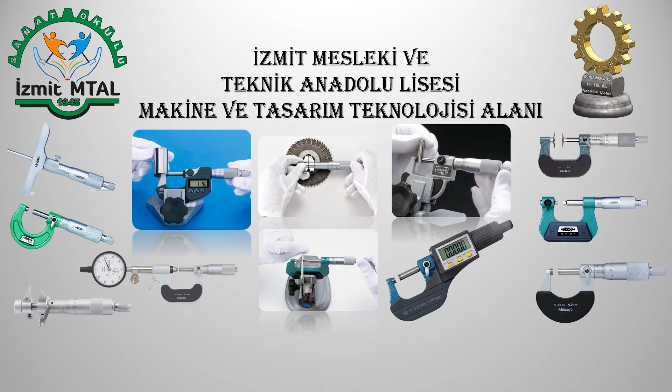Mikrometreler de bir ölçüm ve kontrol aletidir. Bu ölçü aletleri, mekanik kumandalı vida somun sistemine göre çalışır. Ölçü tamlığı kumpaslara göre daha yüksektir. Metrik mikrometrelerde ölçme tamlığı 0,01 milimetredir. Parmak mikrometrelerde ise ölçme tamlığı 0,001 inçtir.

Mikrometrelerde birbirinden farklı ölçme alanları oluşturulmuştur. En küçük ölçme alanı 0 ile 25 mm olup 25'er mm aralıklarla 300 mm'lik çaplara kadar ölçüm yapılabilir. 300 mm'den büyük ölçme aralığı 100 mm artarak gider. Bunun sebebi ölçme işlemini yapan hareketli çenenin kısa boylu olmasını sağlamaktır. Böylece ölçmenin esneme, ısı ve benzeri dış etkenlerden etkilenmesinin önüne geçilmiş olur.

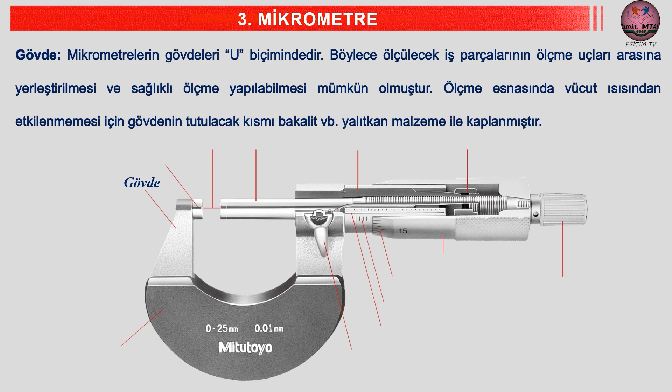Çene, mikrometrenin sabit olan ucudur. Sertleştirilmiş ve taşlanmış olan bu uç ölçme esnasında iş parçasının yüzeyine temas ettirilir. Daha sonra tambur çevrilerek hareketli uç, bu ucun tam karşısına gelecek şekilde iş parçası yüzeyine yaklaştırılarak ölçme işlemi gerçekleştirilir.

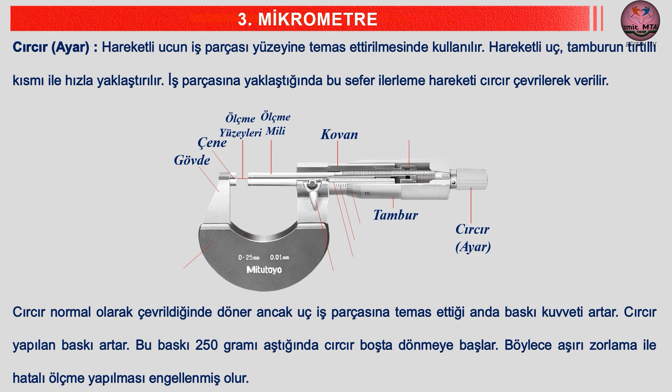Mil sabitleme pimi. Ölçme işlemi sonucunda hareketli ucun gevşemesini önlemek ve daha hassas ölçme yapabilmek için hareketli ucun tespiti için kullanılır. Burada dikkat edilmesi gereken husus, sıkma kolu kapalı durumdayken tambur ya da cırcır çevrilmemelidir.

Isı yalıtım levhası. Ölçme esnasında vücut ısısından etkilenmemesi için gövdenin tutulacak kısmı plastik, bakalit, seramik ve benzeri yalıtkan malzeme ile kaplanır.

Tambur taksimatı, kovan taksimatı, referans çizgisi.

Mikrometrelerin çeşitleri. Mikrometreler okuma sistemi ve kullanım yerine göre iki ana grupta sınıflandırılır. Okuma sistemine göre mikrometreler.

Verniyer bölüntülü, ölçü saatli (kadranlı), dijital.

Kullanım yerine göre mikrometreler: dış ölçüm, iç ölçüm, derinlik, modül, vida, özel.

Verniyer bölüntülü mikrometre. Ana skalaya ve tamburdaki skalaya ek olarak, ana skalanın üzerine yerleştirilen bir verniye skalası bulunur. Bu verniye skalasındaki bölüntüler, ana skala ile birlikte okunması gerekir ve okumalarda bir sonraki ondalık hassasiyet düzeyi sağlar.

Ölçü saatli mikrometre. Ölçme ve okuma kolaylığı için geliştirilmiş mikrometrelerdir. Ölçme hatası neredeyse ortadan kalkmıştır. Ölçme hassasiyetleri 0,01 milimetredir. Kovan ve tambur bölüntülü olan türleri olabildiği gibi bölüntüsüz olanları da vardır.

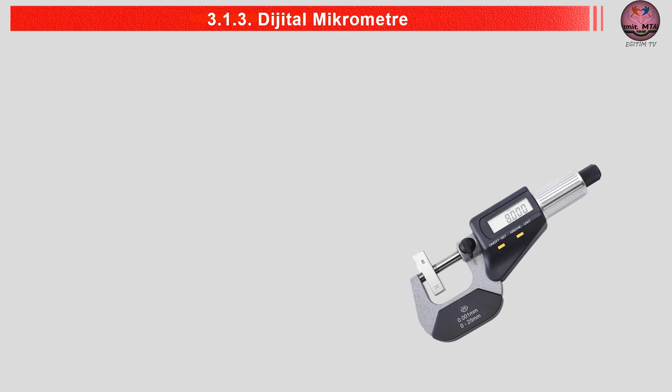Dijital mikrometre. Dijital mikrometrelerin yapı bakımından verniyerli olanlardan farkı yoktur. Ölçüyü, batarya ile çalışan donanımı sayesinde bir ekran üzerinde yazarak gösterirler. Hem metrik hem de inç ölçü sistemine göre ölçme yapabilirler. Bazı tiplerinde USB çıkışı bulunup yapılan ölçümler bilgisayara aktarılabilir. Bu mikrometrelerin üzerinde ölçü sıfırlama, mutlak artımlı ölçüm, ekran sabitleme olmak üzere genellikle 3 adet buton bulunur. Mekanik mikrometrelerde olduğu gibi verniyer bölüntüsüne sahip olduğundan pili bittiğinde de ölçüm için kullanılabilir.

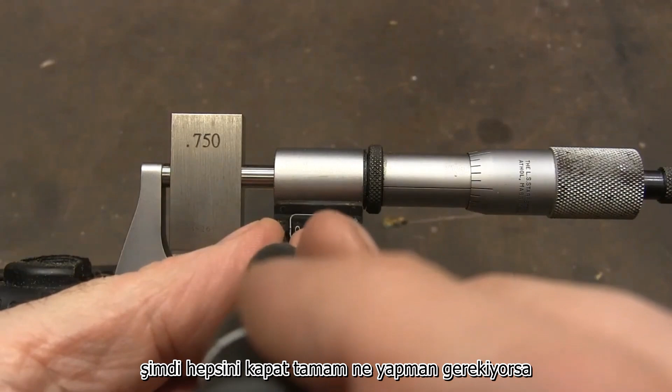Now the thimble, fixing this part is really straightforward. Let's lock the spindle, and then if you look back here on the back, you see this little hole, and that's to hook this little spanner in like that, and then you come around and all you do is just move it until it lines up. Okay, but our numbers are still off. So in order to fix that, what we have to do is we take this little plastic cover off. Alright, now what you have to do is you undo these screws right here on the sides.

Alright, you're going to slide this rack down. And what that does is it disengages the ratchet. So now we're going to very gently move that to 0, and we're going to slide it back up. Very gently.

Alright, so before we screw that back down, let's just test it. Loosen that up. Okay, there we are at 7. .750.

I don't really like that 5 bouncing around like that. Okay, just to check, I also ran it down to 0. And so we're still lined up here and we're lined up there. So I'm going to go ahead and get this screwed back on. Alright, so that's got the cover back on. And just one more time. There it is, perfectly calibrated.

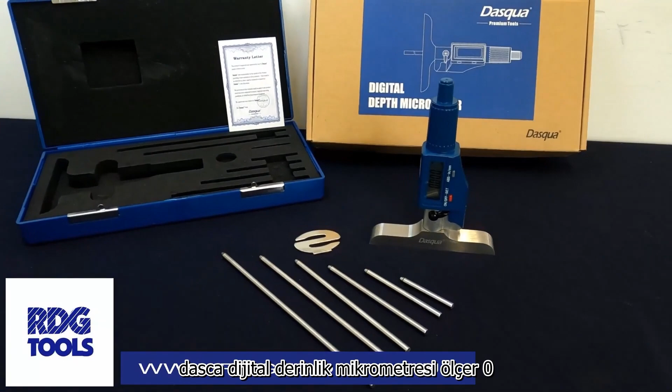Dasqua Digital Depth Micrometer Gauge, 0 to 150 mm. Micrometer is an instrument used for making precise linear measurements of dimensions such as diameter, thickness, and lengths of solid bodies. The measuring range is 0 to 150 mm, 0 to 6 inch. The accuracy is 0.005 mm, 0.0002 inch. Used to measure depth of holes or parts with grooved or elevated surface. The digital depth micrometer gauge is strictly made in accordance with DIN 863. With a ratchet stop for constant force, also spindle hardened, ground and lapped for ultimate accuracy.

A depth micrometer allows precise measurement of depth for features like holes, slots, recesses, or keyways. The tool has a hardened, ground and lapped base attached to a micrometer head and includes several measuring rods. Each rod allows measurement for a given 1-inch range. The sleeve graduations run in the opposite direction. If the 0 to 1 inch rod is in the tool, 0 depth would be when the tip of the rod is flush with the base and the spindle turned out 1 full inch.

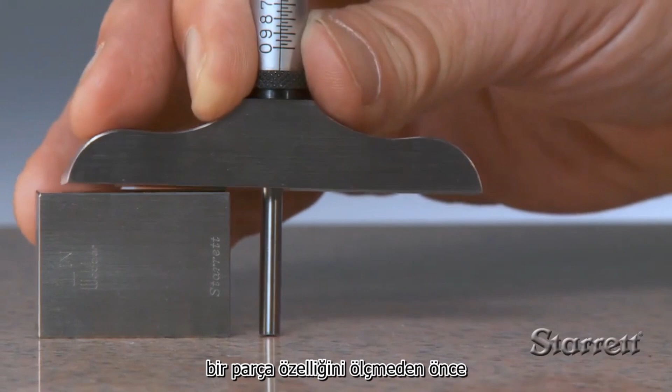Before measuring a part feature, ensure that the tool is accurate with the gauge block and surface plate. Back the spindle away, seat the base squarely on the block, then turn the spindle until the rod touches the plate. Then, to measure, carefully position the depth mic with the rod in the hole to be measured. Then, firmly seat the base against the reference surface. Next, turn the spindle slowly in a clockwise direction. When the tip of the rod touches the bottom of the hole, immediately stop turning. Then carefully remove the tool from the hole. Highly accurate and flexible, the depth micrometer is ideal for a variety of applications.

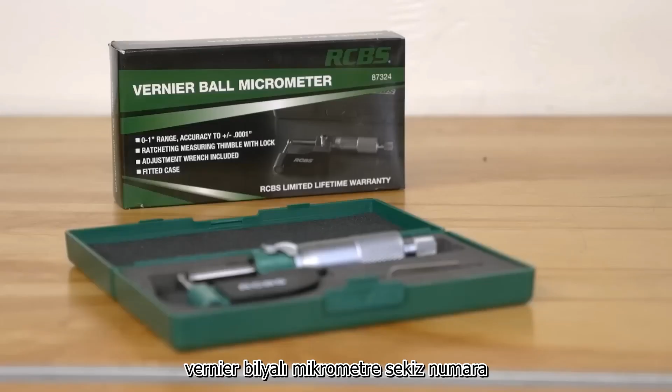So what I want to show you specifically is the RCBS Vernier ball micrometer number 87324. This is a great tool. RCBS has this great product, it's available at a reasonable price, and it works really well. I'm going to show you that next.

Let's take a quick look inside the box and see what you get with this setup. It's in a nice plastic case, which I like because I can take it with me if I need to. I've got the tool that's used to set the zero so that you can calibrate it. That's definitely super important. Looks like a nice tool.

I've got the ratchet thimble, which is great. You can see that it's zeroed out. Nice, that's always a good place to start from. We've also got a lock here so we can lock it in a particular position. I had to tighten it just a little bit more. It's also got this plastic insulating cover over the body, which is nice because that transfers less heat from our hands to the unit, meaning it will influence the readings that much less.

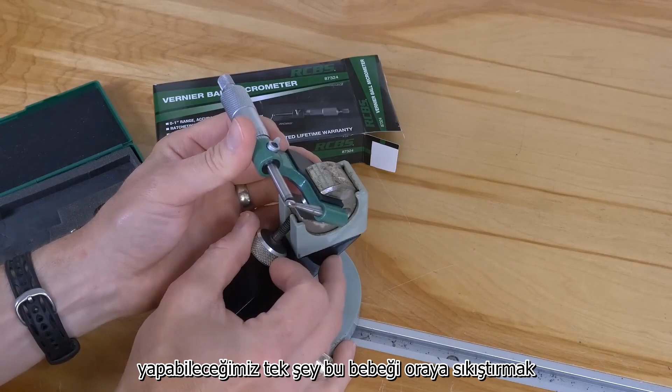Now, if we really want to go to town with this, we can mount it in a micrometer base stand, which I just happen to have. Check this out, I got this old industrial, super solid iron micrometer base off eBay for about $20, I want to say. So what we can do is just clamp this in there, and now we don't even have to worry about handling it, or about the issue I just mentioned, the heat of our hands transferring to the tool.

Very nice. So to show this tool in action, I have a few pieces of brass here: 223, 243 Winchester, and 308 Winchester. So we've got a 22 caliber case neck, a 6mm case neck, and a 30 caliber case neck, just to give you an idea of the variety. Now, I was definitely intent on getting a ball micrometer that would work with 223, since that's one of the cartridges I load frequently. So let's take a look at this.

We want to use the ratchet thimble where necessary. So we've got 12 thousandths, 11 and a half, 11 and a half essentially. Okay, so that's fairly consistent, and we got a good reading off of that.

Now for the 243, this is going to be a little thicker. 13 and a half, 13 and a half. This is Hornady brass. 14, 14, 13 and a half, a little over 14. So we're getting a fairly consistent thickness from this Hornady 243 brass.

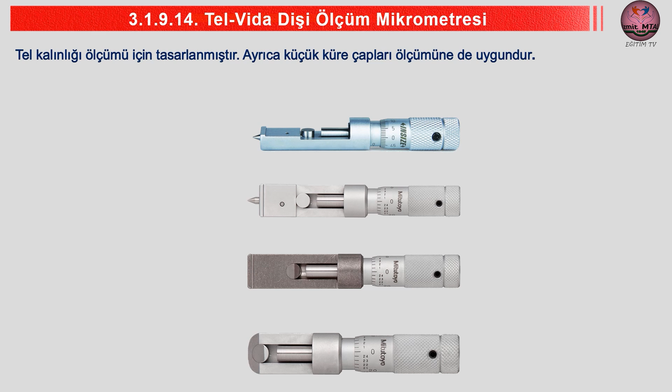Hi friend, today we are unboxing Mitutoyo Can Seam Micrometer 147103, Can Seam Micrometer Series 147. Measure the width, height and depth of can seams. Order number is 147103. Range is 0 to 13 mm. Least count/graduation is 0.01 mm. Accuracy plus minus 3 micron. For steel cans it is 103, for aluminum cans 105, and 147 for spray cans. This micrometer is used for steel cans.

What is inside? Mitutoyo boxing, Mitutoyo order number is printed here. Polythene cover, plastic black color, Mitutoyo marking on that. Then micrometer spanner and Allen key for zero setting.

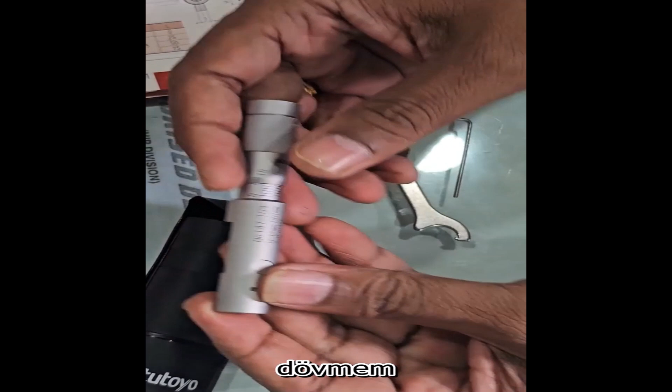Mitutoyo Can Seam Micrometer 147103. Range 0 to 13 mm. Least count, serial number 07196. Mitutoyo, it is made in Japan.

Very good stainless steel material. This Allen key for zero setting. Good metal, chrome finish, sturdy material. With the help of this you can check the steel can's diameter, width and depth.

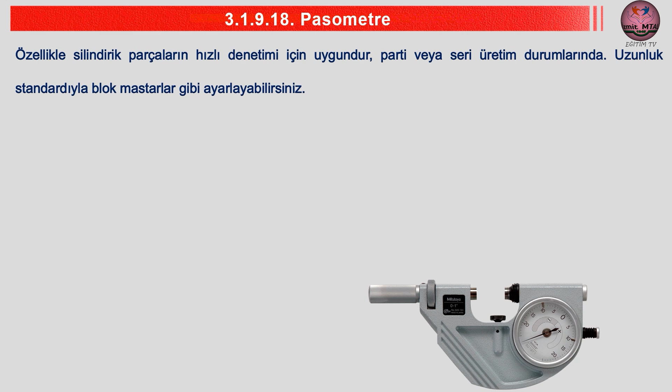Hi friend, this is Mitutoyo dash snap micrometer, also indicating micrometer 510 121, Mitutoyo 0 to 25.

After lapping the two measuring faces, we can check the parallelism of this with the help of this 1.5 mm carbide pin. We are lapping this micrometer and checking the accuracy of this dash snap or indicating micrometer.

Applying pressure, set 0, then lock the spindle movement. We can cross check.

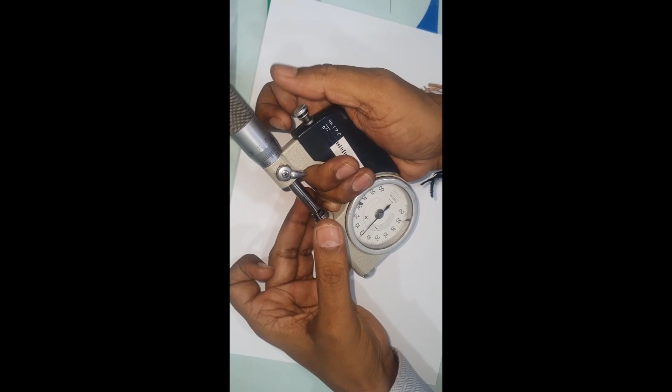This is 1 micron. Now top of the end, 1 micron. It's 0 0. It's 1 micron. Center 0 0. Top end 0.1 micron. 1 micron. 0 0. 0 0. 0 0. 0 0 0 0.

We are giving accuracy 2 to 3 micron after lapping this indicating micrometer Mitutoyo 0 to 25, 510 121. If any requirement for lapping and repairing, please contact us on 9028 000 350.

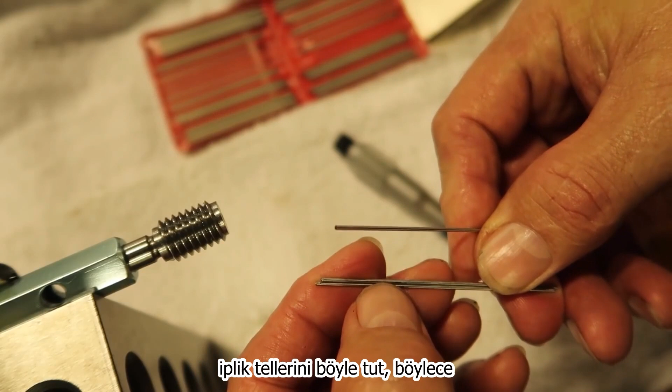I hold the thread wires like this. I put 2 of the wires in my hand here and 1 like this. Then I grab my micrometer and I'm holding it on top of my hand, and I put my little finger underneath the anvil, the moving anvil of the micrometer. So I'm going to put it up on the thread like this.

Then I can stick one of the wires in there like that. Then I can find the 2 threads I want to put these other 2 wires in. And then tension the micrometer. Now I can feel the resistance on these 2 wires until I get it the same, or approximately the same, by moving the mic like this to exaggerate it, and I can make sure that my micrometer is square to the axis of my thread when I take my reading here on the mic, like that.

And then when you're done, you release the micrometer and you grab this wire and you can lift them all out and you don't drop them into the chip pan or anything like that. Although if you're running a CNC lathe, I would recommend you turn your chip conveyor off and possibly even lay a towel or something underneath the spindle there, because if you drop one of these in the chip conveyor, you can lose it real easy.

Or even in a bigger engine lathe, it's pretty hard to find that if you got a lot of shavings down in the bed of the machine. So that's how I do it. Just a little quick video showing that.

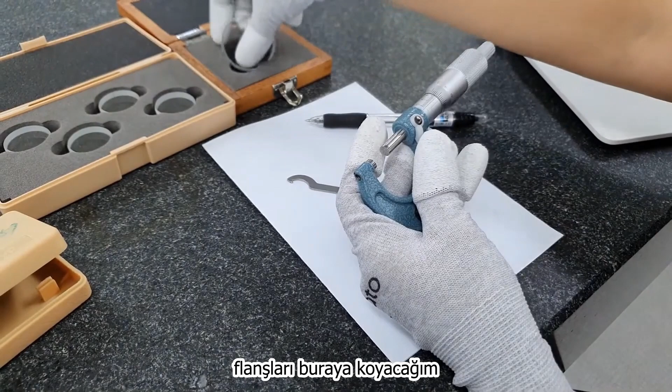Then you have to spin it. I will write it down. You can see the spindle has 3 lines, and there is one line on the anvil.

After that, you have to calculate the spindle flatness.

Look at how to measure this. You can see the interference patterns on the anvil are 1, and the interference patterns on the spindle are 3.

Let's say if the wavelength is 0.64 micrometers, for flatness you have to multiply by 3, so it's going to be 0.96 micrometers, and also 0.32 micrometers. So the flatness of the anvil is 0.32 micrometers and the flatness of the spindle is 0.96 micrometers.

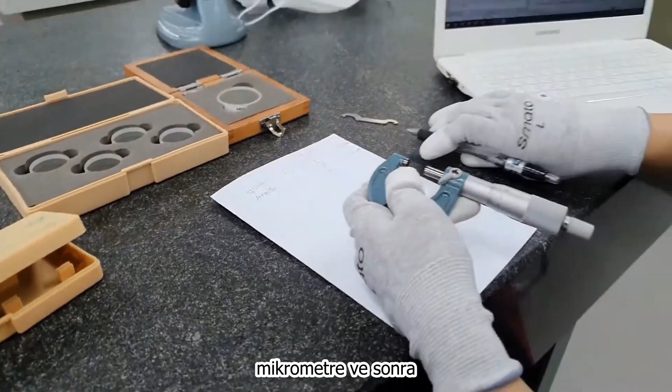And then let's do the parallel test, which is to read how many patterns appear after putting the optical parallel in the pressure foot. After that, add the pattern numbers of the anvil and spindle. You have to choose after measuring many times, changing the optical parallel position, and multiply by half the wavelength with that measured value.

I will give them the numbers 1, 2, 3, and 4. So I will write it down as 1, 2, 3, and 4. I will write the spindle here and the anvil right here.

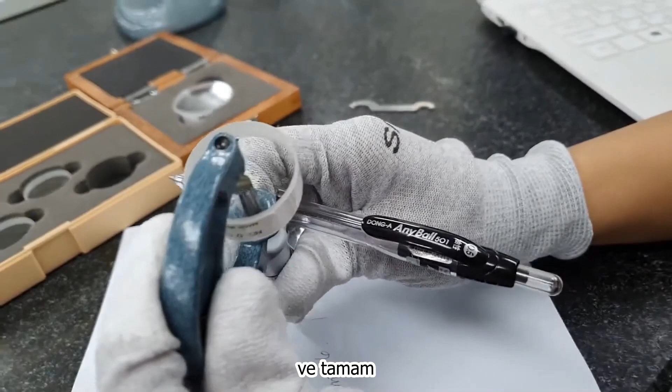You can see two lines of spindle and one of anvil. For number 2, you can see 2 lines of spindle and 1 line of anvil. Then for number 3, you can see 2 lines of spindle and 1 line of anvil. For the next one, you can see 2 lines of spindle and 2 lines of anvil as well.

And the last step is to compare the required tolerance with the measured value. The first number of interference patterns of the optical parallel is 3. The second number is 3. The third number is 3, and the last number is 4. So if we multiply half of lambda by 4, it becomes 1.28 micrometers.

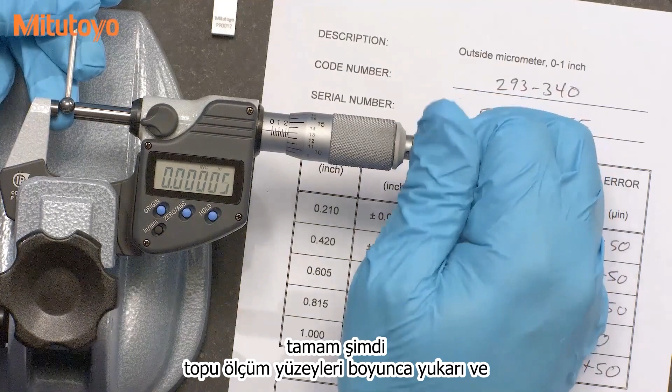We're going to start by measuring in the middle of the measuring faces, and then set our zero there. Now we're going to move the ball across the measuring faces, up and down, backwards, forwards, across the measuring faces. Any variation in size is due to the flatness or parallelism of those two measuring faces. Then we'll report the range of those results, the maximum minus the minimum.

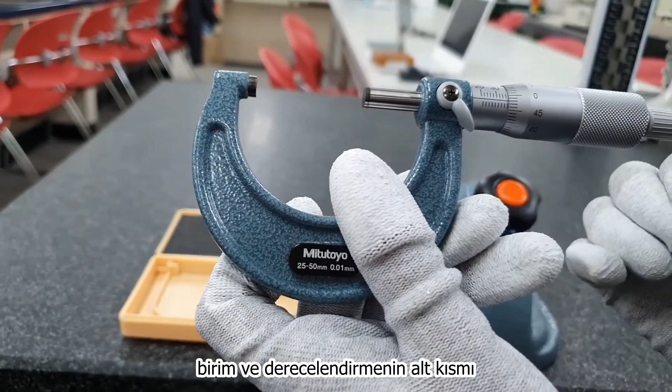I'll explain how to read the gradation. First, read the sleeve. The upper part of the gradation is in 1 millimeter units, and the lower part is in 0.5 millimeter units. Second, read the thimble, which is tangent with the baseline of the slit. Last, add those gradations together. Before measuring, make sure the gradation is correct. If the gradations are not correct, fix the spindle with the clamp and turn the sleeve using the key spanner, like this, or like this. Once you finish the correction, you can measure the specimen. When measuring, read the gradation after turning the ratchet stop 3 times for measuring pressure.

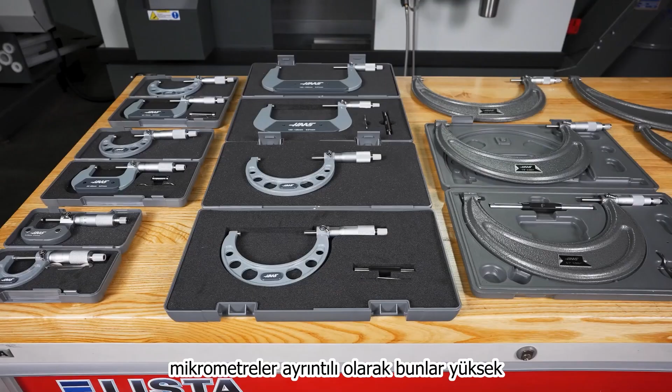Let's first look at our analog OD micrometers in detail. These are high quality precision mics designed to give you repeatable results over a long term. They are built solid like you'd expect. This mic has a stainless steel spindle and there are carbide tips on both ends.

The carbide ends are the faces that contact the measuring surface. Having precision ground carbide tips that are more wear resistant will extend the life of your micrometer.

The precision mechanism that controls the spindle travel is the threaded rod. Traditional mics have an alloy or carbon steel threaded rod. These Haas micrometers have a threaded rod made of hardened stainless steel that is precision ground and lapped to give you ultimate accuracy.

Other features of note are the spindle lock, which prevents the barrel from rotating after a measurement has been performed and before a reading has taken place. And at the end of the thimble is the ratchet stop.

This is another important feature of the mic that allows constant force at calibrated torque that helps the user take accurate readings. We also offer a select range of metric micrometers with a chrome-plated frame and a cover-type heat insulation shield for added stability when handling micrometers for an extended amount of time.

It should probably go without saying, but if you're trying to take accurate measurements, you need to make sure the measuring surface, the micrometer, and your hands are clean, dry, and free of debris.

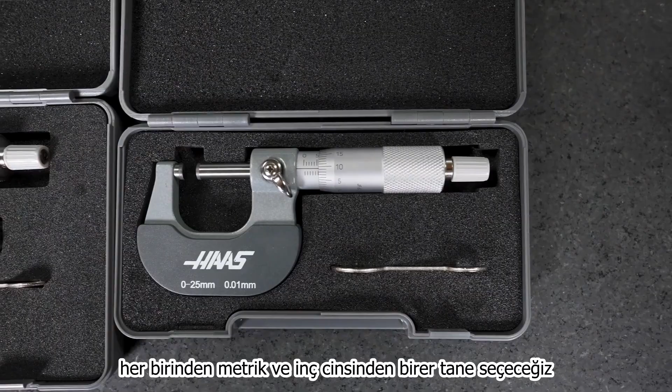So we will pick one from each in metric and in inch, with a size range of 1 to 2 for the inch and 0 to 25 millimeters for the metric. These are common ranges and are found in practically every shop. We will focus on the analog micrometers for this presentation.

Here we have the 0 to 25 millimeter micrometer. The hardened stainless steel threaded rod is precision ground to 0.5 millimeter pitch. One revolution of the thimble advances the spindle by 0.5 millimeter.

On this 0 to 25 millimeter micrometer, the sleeve etchings display the graduations on top every 1 millimeter from 0 to 25 millimeters, with a numerical value displayed at 5 millimeter increments. Below the gauge line displays the 1 revolution graduations of 0.5 millimeter.

The thimble is graduated every 0.01 millimeters or 10 microns, with a numerical value displayed at every 5 marks, up to 50 marks or 0.5 millimeter.

Now let's place this mic in a random position and take a reading. The reading on top shows a metric value that precedes the decimal. We can see the number is 14. Next, we need to read to see if the 0.5 millimeter graduation after the 14 is visible. We can see that it is, so that reading is 0.5 millimeters.

We now need to look at the thimble reading that lines up with the gauge line, and we can clearly see that the 21st graduation is lined up. This is 0.21 millimeters. Now we need to add these three values together: 14 plus 0.5 plus 0.21 to give us a reading of 14.71 millimeters.

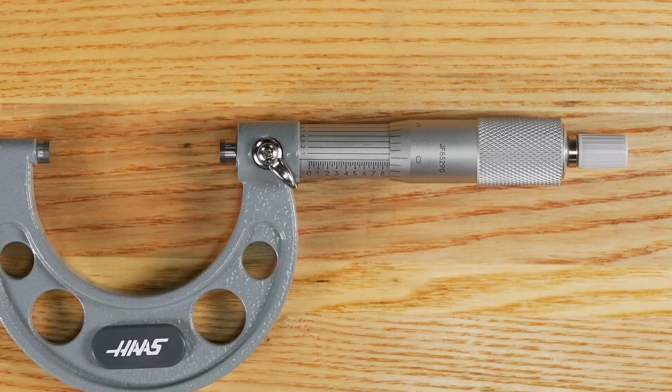The hardened stainless steel threaded rod on the inch micrometers are all precision ground to 40 threads per inch. One revolution of the thimble advances the spindle by 25 thou. The sleeve is graduated every 25 thou, and the thimble is graduated by 1 thou.

The inch mics are all 1/10 micrometers, which is why there is another scale at the 1/10 graduations on the sleeve. The 25 thou graduations along the length of the sleeve are displayed along the bottom of the gauge line, with every 4th mark a little longer, denoting every 100th thou increment. The 100th thou is represented by 1, the 200th thou by 2, and so on.

Let's place this mic in a random place and take a reading. This is a 1 to 2 inch mic, so the first reading preceding the decimal is 1. The next reading is on the sleeve, and we can see the thimble edge is past the number 4. The first and second readings together are 1.4.

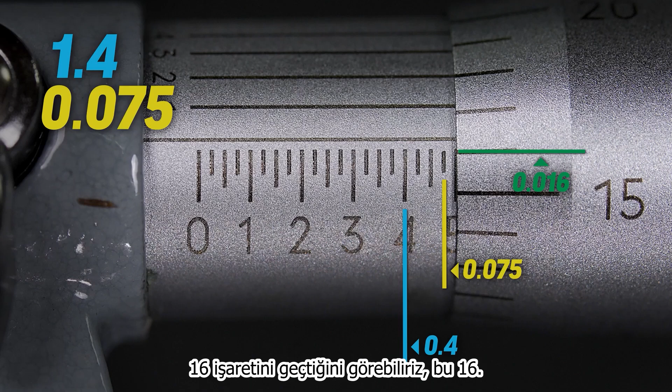The next reading is again on the sleeve, and we can see there are 3 marks visible. Each mark is 25 thou graduations, so this number is 0.075. We now go to the thimble scale to see which number lines up with the gauge line, and we can see it's past the 16 mark, so that's 16 thou. Adding this to the first and second readings gives us 1.491.

Now we need to turn the micrometer to look at the 1/10 numbers on the side of the sleeve. Looking from 0 to 10, we can see that the number 4 lines up with this line, giving us a final reading of 1.4914.

Before we use these mics to measure a part, we need to calibrate them. We should verify the micrometer reading against a standard to confirm it's still reading correctly. Every mic comes with a standard rod with a specified dimension that we can check the mic against, except for 0 to 1 inch and 0 to 25 millimeter micrometers.

With these mics, we can just rotate the thimble until the carbide tip faces meet and verify the reading is 0. Before we check, make sure the faces of the carbide tip are clean. You can use a soft cloth with a little cleaning solvent to wipe the surface clean and dry. But because the faces on these mics fully meet, I like to use a sheet of paper, trap it using the ratchet stop, and then slide out the paper.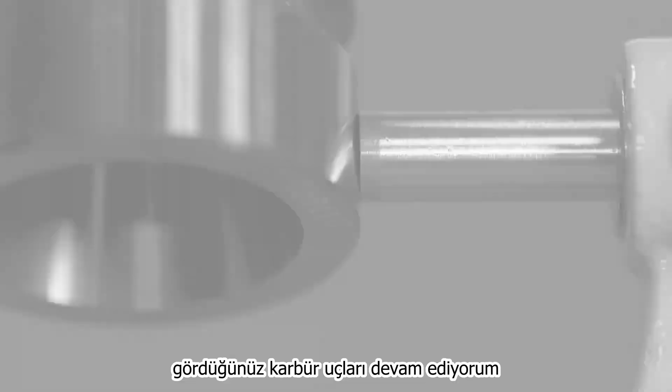Now let's use the ratchet stop to close in on the faces. The ratchet should always be used to measure, as this ensures uniform pressure between measuring surfaces. Only use the thimble to move the spindle quickly from one position to another prior to measuring. Using the thimble to measure will likely result in over-tightening, giving inaccurate readings, and may damage the carbide tips. You can see I continue to rotate the ratchet after the carbide faces meet.

We can now verify the reading is 0 on both micrometers. The line on the sleeve meets exactly with the 0 line on the thimble. We can now go ahead and measure our workpiece. However, if these two lines were slightly offset, there is a quick and easy fix to zero this out rather than sending it to the calibration lab.

In every micrometer box, you will find this little wrench, which can be used to reposition the barrel gauge line so it lines up with the thimble line. Hold the frame firmly and place the notch of the wrench into the hole. The wrench should be placed in the opposite direction of the offset. Now apply a little pressure to rotate the sleeve ever so slightly until the marks line up again. You can now continue to use your micrometer.

How often you should use a standard to verify your mic depends on you. If I'm in a fast-paced manufacturing environment, constantly picking up gauges and dropping them off throughout the day, my calibration routine may be more frequent. It's always good practice to calibrate after someone borrows the gauge for a minute. Finally, if you get a reading on your workpiece that doesn't seem right, always calibrate and remeasure before making any changes to your offsets.

Now let's measure the workpiece diameter with a 1 to 2 inch micrometer. The best way to handle the mic is whichever makes it most comfortable for you. It is also required to place the mic over the measuring surface as perpendicular and square as possible. It's good practice to start with the smallest mic you own, because as the mics get larger, so does the difficulty to gauge the correct way to line it up.

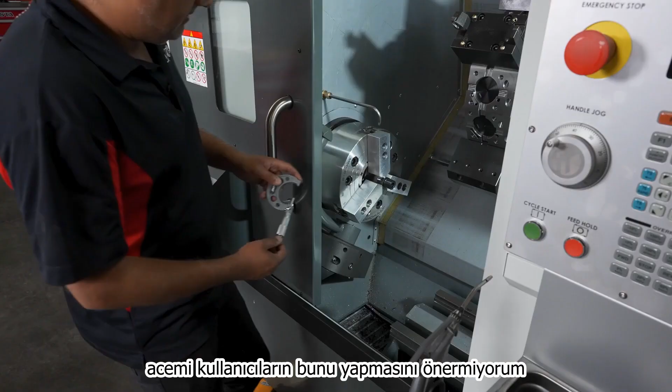Although on the small mics I usually use the same hand to hold and use the mic, I don't recommend novice users to do this. I would also not recommend novice users use this mic to measure parts inside a machine, as just getting in and orientating the mic can get really awkward and uncomfortable.

I suggest practicing with a small mic, with the part laid vertical so the mic can approach the workpiece horizontally. This places your hands in a natural position without any difficult twisting of the wrist, and the reading is directly in front of you.

Hold the frame and align the fixed carbide tip against the center of the surface. Use your other hand to rotate the ratchet stop slowly. As the spindle closes in on the diameter, a small slight wiggle to the frame with a back and forth motion will also help control the alignment of the mic.

Eventually the ratchet will start clicking and you should be able to move the mic back and forth slightly and smoothly. If there isn't a smooth movement, then reverse the thimble and try again. Once you are happy with this feel, use the spindle lock to hold the thimble in place. You can now slide the micrometer off the measuring surface. This slide should feel smooth and effortless.

We can use the same part to measure with the metric mic. Here we have a 25 to 50 millimeter mic. I'm going to use the same method as before, and you can see the ratchet is clicking. Now I'm going to lock the spindle and slide the carbide surface off the part, and again it feels smooth.

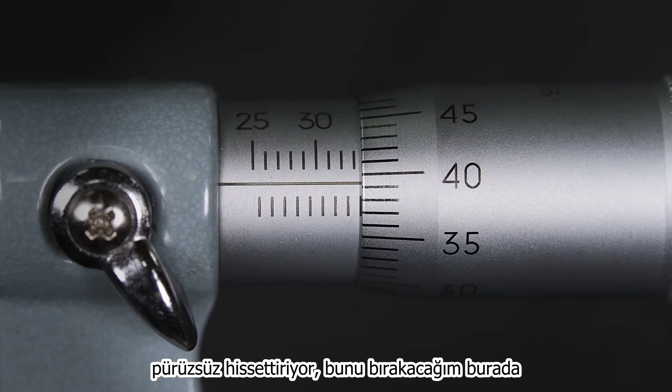That's the basics of an OD mic, and that's just the start. Look out for more videos, each focusing on the mics mentioned at the beginning of this presentation.